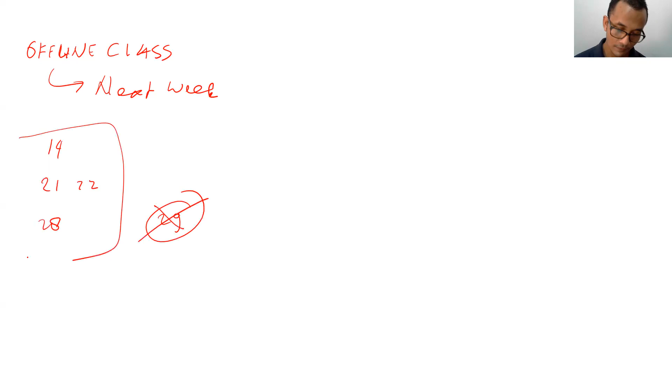Starting from next week, most of our classes will be offline. If you take a look at the schedule, including today, we still have 4 more classes. Today is 14th of April, then next week we have 21 and 22 April, and the week after we have 28 April. Unfortunately, 29 April is cuti bersama, so we will consider this a public holiday and there will be no class that day. So we only have these 4 classes left: today, 2 classes next week, and 1 class the week after.

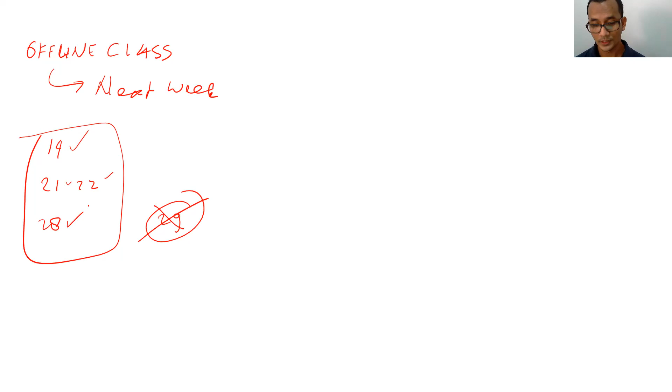In order to ensure that you can catch up well with the topics I have delivered up until now for the preparation of the final exam, starting from next week our class will be done offline mostly. So on 21, 22, and 28, we will do our class offline.

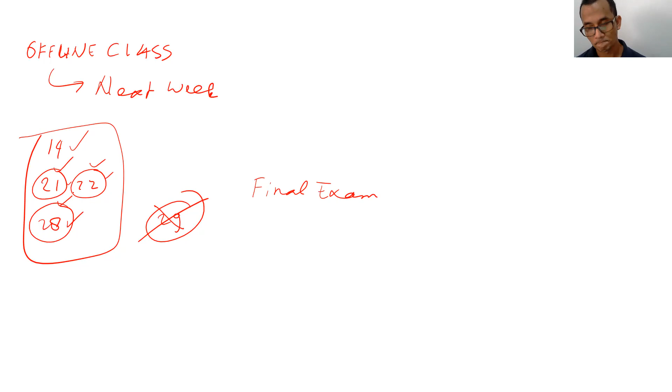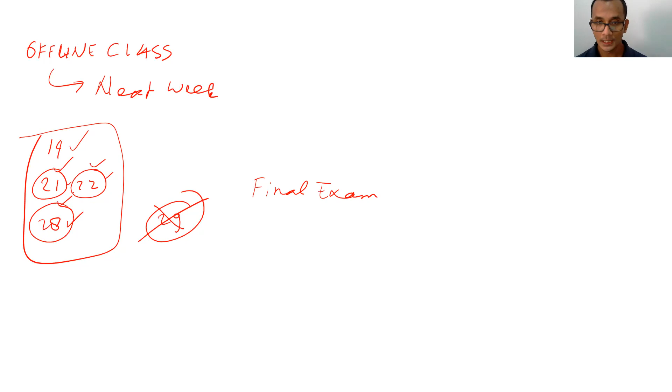But for those who are sick or who, because of unfortunate circumstances, got COVID or something like that, in order to ensure those students can still listen to my class directly, I will make it so that online is available as well. So actually, these 3 classes will be hybrid.

But I encourage you guys to come to class offline, to come directly, so I can teach you face to face on these 3 days. I have already booked the room. The room for this hybrid class will be room 4104, in our faculty building, level 4. Please come to class on these 3 days.

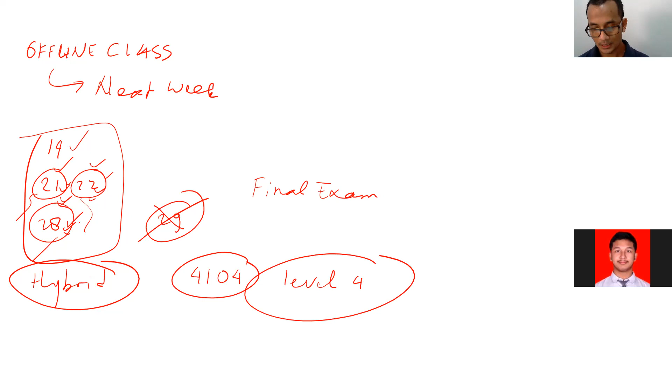For those who are sick, or who unfortunately got COVID, you can still join the class online. But for those who are not sick, if you are healthy, I ask you to come to class. Any question about our class next week, starting from next week on these 3 days?

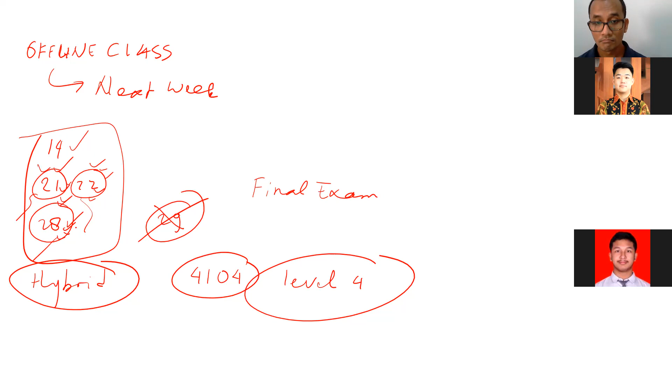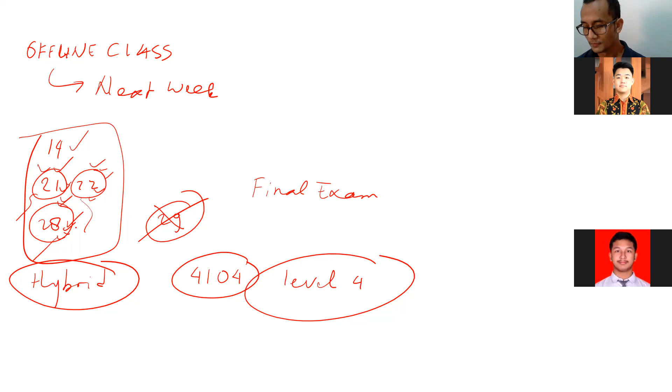Sir, is there any specific things we should bring to the class? Not necessarily, just bring yourself and dress properly, don't just use underwear like that. That's supposed to be enough. Just bring your notes and your own pen. I think that's supposed to be enough. Nothing necessary for this, so there's no need to prepare something special. If you want to bring your calculator to practice as well, it's supposed to be okay.

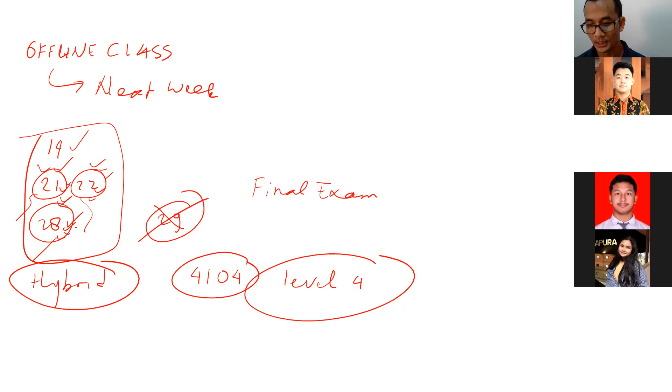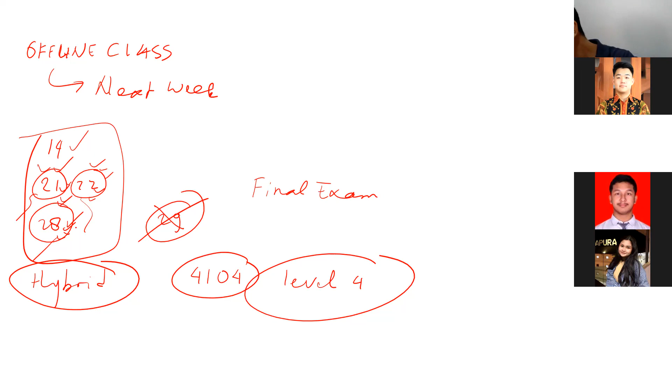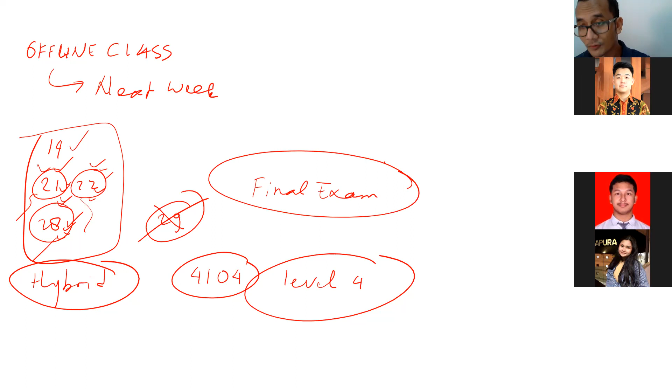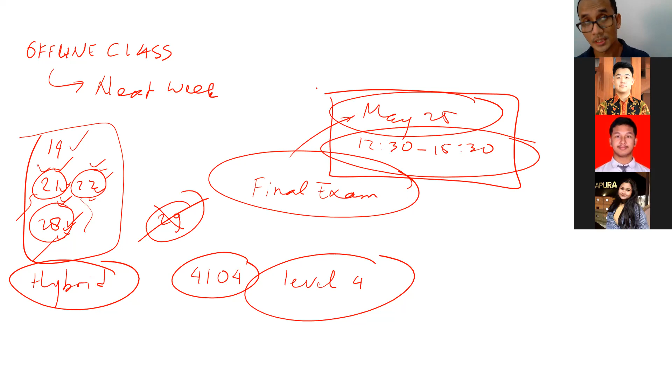And one more thing, I need to inform you as well about academic matters, because you need to know about your schedule for our final exam. Our final exam will be held on the third week of the exam period, the last week of the exam. It's on May 25th, from 12:30 to 15:30. Actually, this schedule is there on academic.iba.ac.id. Based on the discussion between the lecturers, we will stick with this schedule.

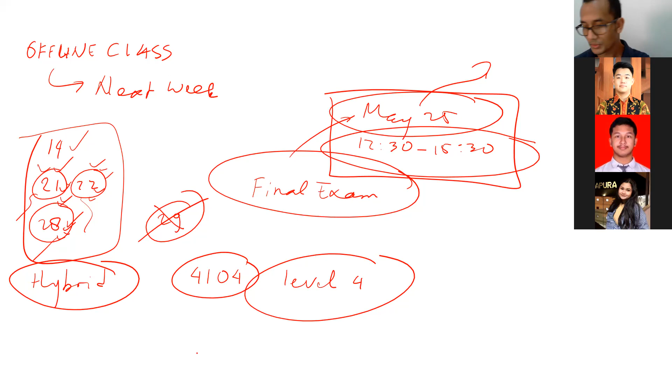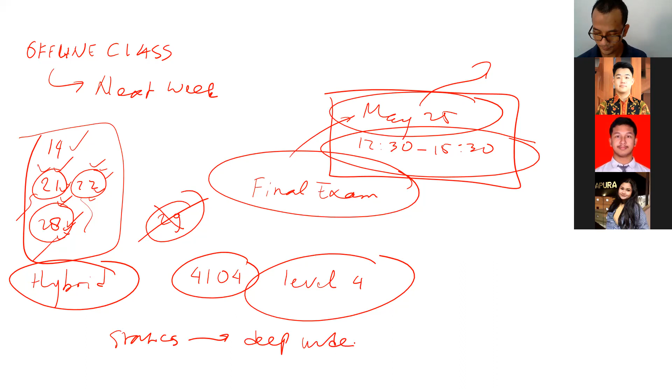Maybe some of you are wondering why suddenly we do this offline or hybrid class. It's most likely because statics is one of the subjects that needs deep understanding, and delivering the class fully online makes it hard for me to deliver everything to you guys. Sometimes there's a connection problem, and I cannot see your face directly, I cannot see your eyes directly to know whether you understand or not. So at least I will use the last 2 weeks of our class mostly for offline meeting. Any question about this?

So starting from next week, on Thursday at 10 a.m., instead of coming to the Zoom meeting like this, what you have to do is go to campus, go to the FME building, our faculty building, go up to the 4th floor, and try to find this particular room. We will start the class at 10 in the morning.

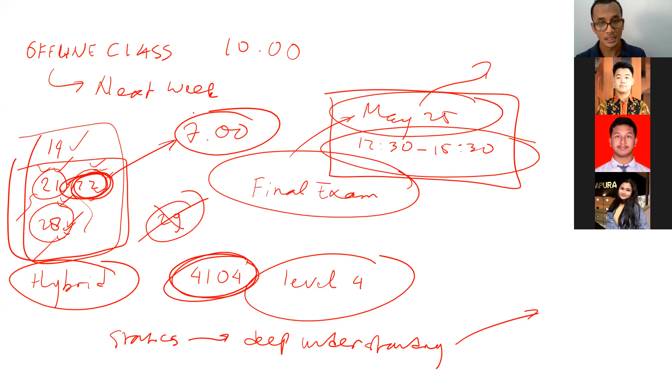The challenging one will be this one, Friday 22 April. Why is it challenging? Because the class will start at 7 in the morning. I will try to do this as well in order for you to get used to it next semester, or for some of you taking a short semester, you have to get used to it, because starting from our short semester, based on the information I got, most likely it will be full offline.

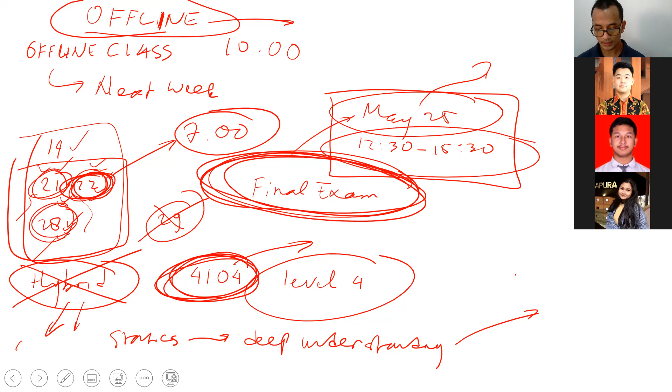In that case, I think I will start our discussion on, maybe this is our last topic. The last topic of this semester is about friction. This topic actually consists of several parts. The first part will be dry friction. In dry friction, I will discuss about the impending motion and the tipping problem as well. So this is the basic of friction, dry friction.

Then after dry friction, we will discuss about wedges. For those who are wondering what wedges are, it's not the shoes that female students like to use, but the wedges we want to discuss here, in Bahasa we call it 'baji'. Something like this, the shape is something like this. Something that you use to stop the door from moving, something like that. Okay, those kind of wedges.

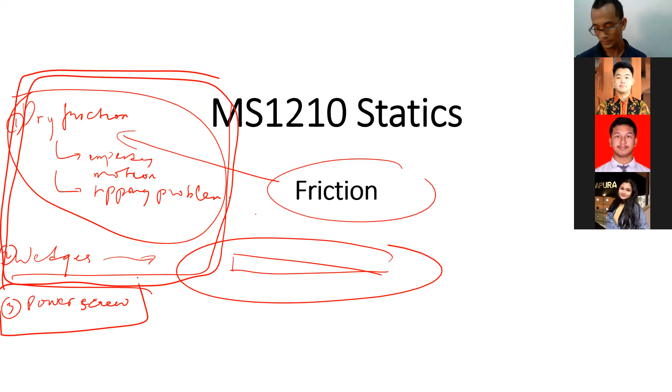That is our second friction topic, and the last one, but I'm not sure whether we will be able to reach this or not, is power screw. Most likely these two topics will be covered in our exam, in the last two weeks, but I'm not sure about this. If it's possible, I will discuss power screw, but if not, we will just concentrate on the wedges. So those are the friction topics we will talk about.

Why is it important to discuss friction? Because in our statics problems, in our mechanics of materials problems, there are several times it is quite often that we face a friction case, a case with friction. So like it or not, we have to know about this.

I think we will start the discussion for today. Our main concentration is on dry friction. Maybe next week on Friday, we will start the discussion on wedges. On Thursday next week, I believe I will still continue the discussion on this. As usual, after today's class, it's better for you to check Edunex for the homework on dry friction, because our Friday class is gone due to holiday.

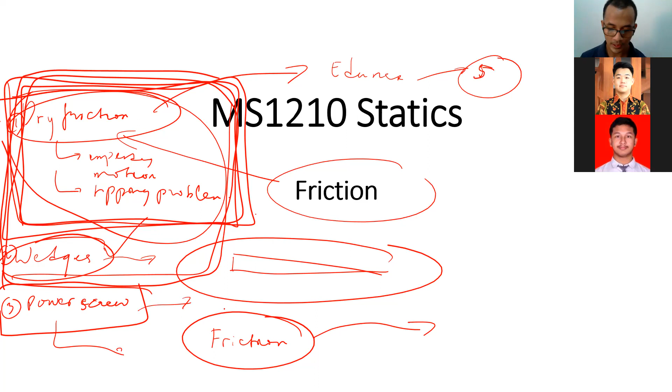So when we talk about friction, there are several types. The first type we will talk about is dry friction. Dry friction is friction which does not involve any liquid.

Dry friction is a friction which does not involve any liquids. For example, dry friction happens on the surface between the asphalt and the tire of the car, like this. We call it dry friction because there is no liquid there.

The second type of friction is fluid friction. Fluid friction is friction which involves liquid. For example, when you swim forward, there is a friction from the liquid, from the water, which prevents you from going faster.

Those are examples of fluid friction, and besides that there are several other examples. If you take a look at the engine of a car, most engines in a car or motorcycle need oil in them. When it runs, there is friction between those moving parts, and because there is oil there, the friction happening in that engine most of the time will be fluid friction, because it involves liquid. So that's the second type of friction.

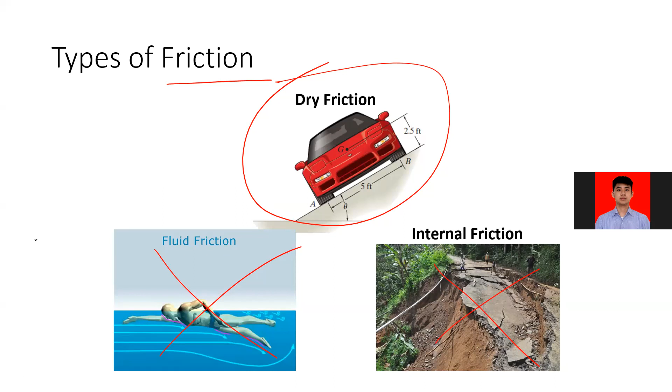Alberto Hans, is it correct? You learned about friction in the first year in ITB? Mu kinetic, mu static, yep, that's the one you learned about, right? Yeah.

So in the first year, when you talked about friction in a physics problem, I believe you discussed about friction as well. So the things we will discuss today are a continuation of that.

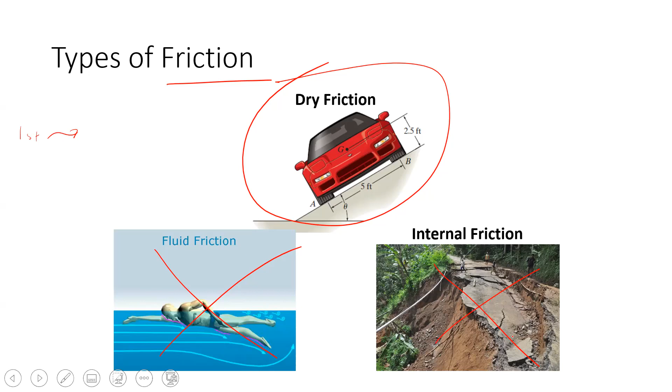Let's continue. Now we will talk about the detail of dry friction. In physics, when you have a box like this with its own weight, and it has contact with the ground, then there is a pulling force P trying to move the box from one point to another. In physics, what you learned before, this is the free body diagram you normally draw: you have W, the weight, and P, the pulling force, and because there is a reaction between the ground and the box, there will be a normal force.

Okay, because there is friction on this surface between the box and the ground, there will be friction force. When we talk about the free body diagram, most likely it's like this. When the force P here is bigger than the friction force, the thing will move forward. But if the force P here is less than the maximum static friction force, then the thing will stay stationary, something like that.

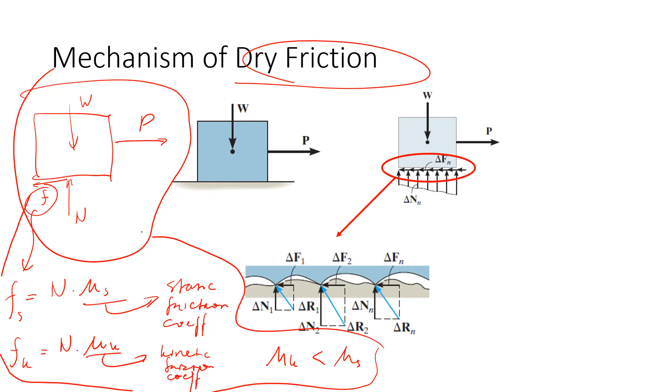But if we want to take a look in detail, and we have to take a look in detail in our statics discussion for the friction here, this is what is actually happening. So instead of like this, the thing that is actually happening is like this, and it is logical.

Why is it logical? Because when we take a look at the normal force and the friction force, it's supposed to be happening at an area, the contact area, and the contact area is supposed to be the one at the bottom here. So the normal force and the friction force, instead of both being represented as a concentrated force, the most correct way is to represent them as a distributed force like this, distributed along the bottom area, for both friction force and normal force.

And if we take a look in detail, if we zoom in at those parts, actually the real thing happening at the contact surface is supposed to be like this. There's supposed to be a normal force at each contact point, because later in your second or third year you will learn that nothing in this world is completely smooth. So when we take a look at one thing and it looks smooth, but if we zoom in at microscopic level, most likely those things won't be completely smooth.

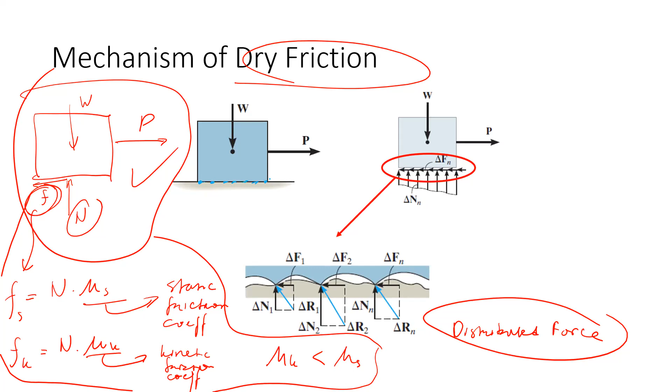Up until this point, is there any question? Student: Sir, just want to make sure that the third picture at the bottom is just the zoomed version of the distributive force, right? Instructor: Yes, the close-up shot, correct. This one is actually the zoomed version of this.

So if we zoom in a little bit at this location, for example, this is what will be happening there. Okay. Any other question before I try to continue with our discussion?

If not, then I will discuss more about this dry friction, and later at the end of the class I will discuss some problem examples. This is the continuation of what we discussed before.

Because the friction force is like this, and the distributed friction force is like that, and the distributed normal force is like this, when we take a look at it, in some conditions this kind of thing is possible, where the concentrated force representing the distributed normal force will not be at the same line of action as the W here.

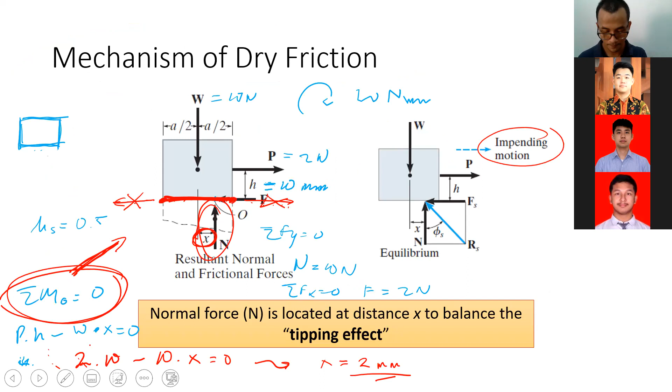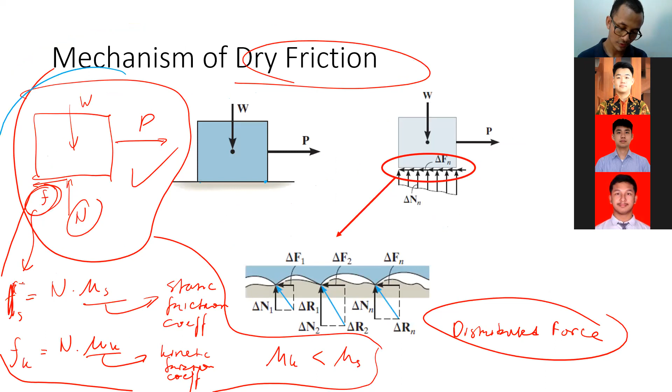When we talk about the normal force, friction force, as I told you before, there are two types of friction force: the static friction force and the kinetic friction force. What are the differences between those two?

When we take a look at this, the free body diagram is as you can see here. So there will be a pulling force like this, W like this, then normal force like this, then friction force like this.

Try to imagine if the pulling force is very small. For example, in this case, our W is like the previous case. Our W is 10 Newton. Normal force is 10 Newton because sigma Fy equal to 0. The pulling force is only 2 Newton. The mu s here is 0.5. Okay, let me charge my laptop first.

For example, in this case, mu s is 0.5, and mu k is slightly lower than that, 0.3 for example.

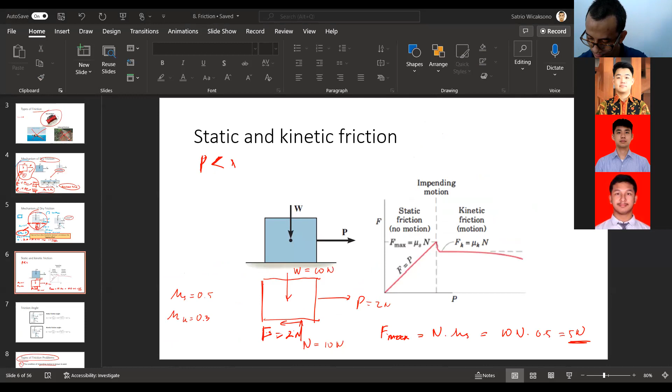Now what is happening here? In this case, the first condition is static friction or no motion, where the pulling force P is smaller than the maximum friction force, F max. So this is, for example, the first condition.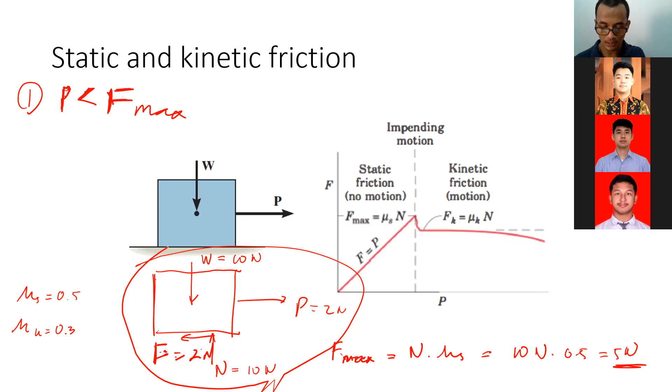Now the second condition: where moving is happening, kinetic friction is happening.

Okay, the second condition is where kinetic friction happens. The kinetic friction happens when the pulling force P is slightly more than the maximum friction force.

What is happening here? Maximum friction force - okay, sorry for the writing. That's the second condition, so this is the first condition and this is the second condition. When the second condition happens, the real friction force that happens will depend on the kinetic friction force.

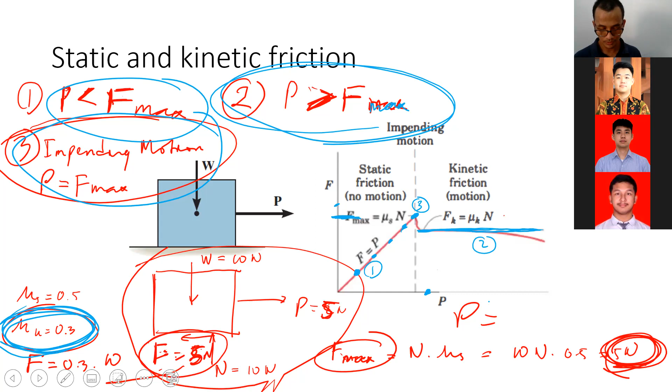Okay, so in that case, I will continue. Beside friction coefficient and the things you have learned before, in this statics problem, we will introduce you to new terms here.

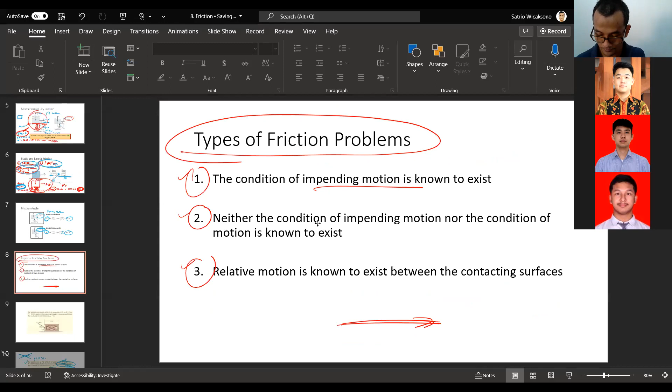Then I want to talk about something very important for us. When you face a friction problem later, normally we can differentiate the problem into three conditions, which differ from one another.

The way to solve it is different between one and the other. The first condition is where in the problem we know that the impending motion is known to exist - for example, it's stated in the problem that impending motion is happening. So that's the first type of problem, when we know that impending motion exists.

Then I will go to the third one first because this one is the easier one. I will talk about the easier problem first. When we know there is relative motion between the contacting surfaces, then we can consider it as the third type of problem.

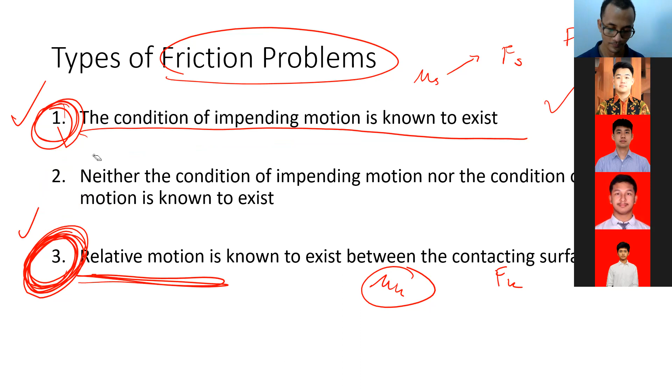The harder one is supposed to be the second one. We don't know yet whether it's impending motion condition or motion condition. So we don't know whether the thing will move, or whether it will stay stationary. That's the second problem, and most problems are actually this second problem, which is the most difficult one. But you don't have to worry about that, the solution is there, so we can still solve it.

In order for you to get used to it, I think I will just show you guys some problem examples.

This is the first problem example. A uniform crate has a mass of 20 kilogram. If a force P of 80 Newton is applied to the crate, determine if it remains in equilibrium. The coefficient of static friction is mu s equal to 0.3. So the problem here is just to check whether it stays stationary or not.

William, hello William. Yes sir. Where are we supposed to start in this particular problem? What are we supposed to do in this particular problem, William? I think I would draw the free body diagram first.

Correct, always start with drawing the free body diagram. We will start with the free body diagram. For example, this is the crate. Then we have a force of 80 Newton there at 30 degrees. The height there is 0.2 meters. The length there is 0.2 meters, sorry, 0.8 meter.

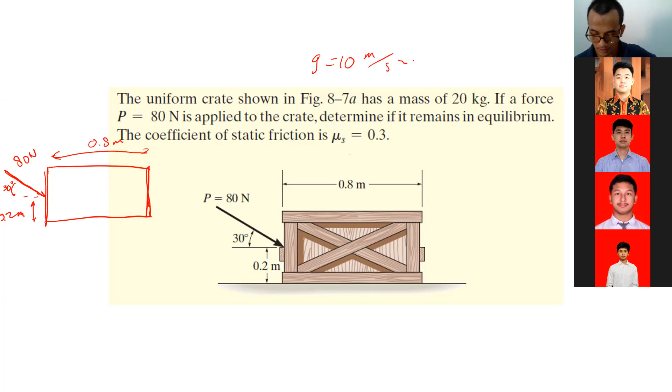What else do we have here? If we use g equal to 10 meter per second square, the weight is 200 Newtons, downwards from the center of gravity. And why it's at the center? Because it's stated there that it's a uniform crate, so it must be at the center. 200 Newton, 20 kilogram multiplied by 10. What else are we supposed to have here?

The friction. Before we go for the friction, I think it's better for us to just add the normal force first. So we have a normal force, let me put it here. This one is normal force. Then beside normal force, we will have friction force.

Then what should we do here, William? In this case, let's just state that the distance between the normal force and the weight is a variable such as x. You can do that. What else? And then sigma moment equals to 0. I think we cannot go directly to sigma moment equal to 0, we're supposed to solve it one by one, right? If you want to use sigma moment equal to 0, sigma moment against which point?

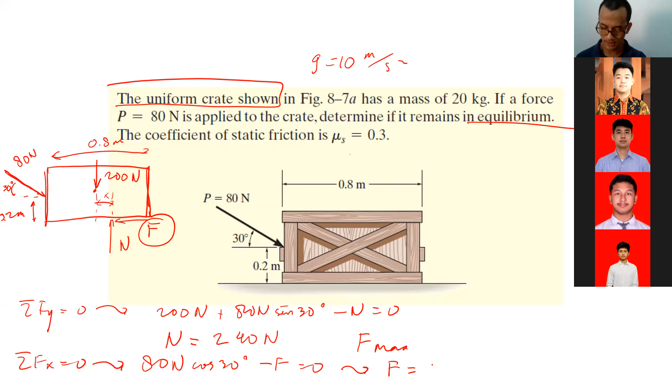What is the value of that, William? 40 times the square root of 3. In decimal? Around 69.3, sir. 69.3 Newton. Yeah, so this is the friction force based on the equilibrium.

Okay, now take a look. We have to take a look again. The value of our F max is supposed to be the maximum friction force possible. Is this value smaller or bigger than our F max? That's the thing that we have to check.

As simple as that. Okay, our F max value is supposed to be like what, William? Should be the normal force times the static friction coefficient. Is 240 Newton multiplied by 0.3, right? What is the value here? Supposed to be 72, right?

Yes, 72 Newton. Now would you mind to compare both? Which one is bigger, F max or F? The F max is bigger. Okay.

If you take a look at this graph, the thing which is happening in the current condition, is it in this impending motion region, or in the kinetic region? In the static region. Why can we determine it like that? Because the friction force based on the equilibrium that we calculate is smaller than the maximum friction force. So in this case, the condition is stationary.

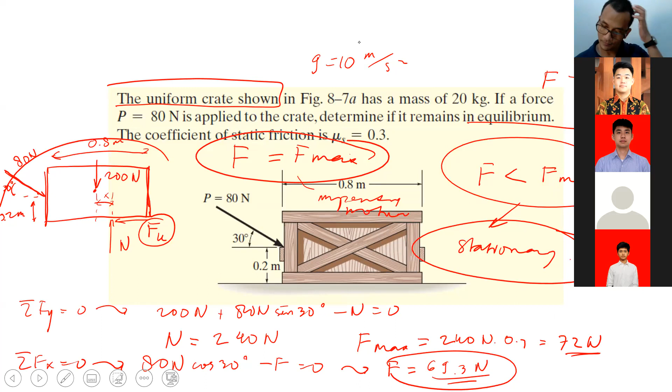Sir, I want to ask, how do you get the Fmax? Where's the 0.7? Sorry, Rehan, I don't get you. How do you get the Fmax?

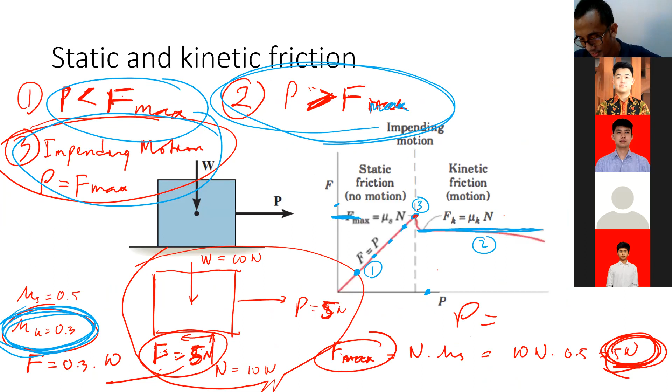We know that mu-s is 0.3, right? So based on our discussion before, Fmax, the maximum friction force available, is always the normal force multiplied by the mu-s, right? Do you get it, right? Yes.

So in this case, in order to determine which condition exists in this particular problem, what I try to do is compare the friction force, the friction force which is happening, based on the calculation of the free body diagram, with the Fmax.

Okay, if the friction force based on the calculation is smaller than Fmax, it means the condition is still static, right, Reinhard? Because the friction is still smaller than the maximum friction force. But if it's the same, then it's supposed to be impending motion, because the friction force is the same as the maximum friction force.

Last one, if F, the friction force, is bigger than Fmax, in this case, it's supposed to be not possible, right? Because the maximum friction force is only 72 Newton, and if the friction force is bigger than that, it's not possible. Yeah, in that case, it means that the pushing force, the 80 Newton pushing force, is too much.

The 80 Newton pushing force is too much, which means that the friction force cannot handle it anymore, which means that the crate starts to move. The crate's moving. Okay, Reinhard? So that's the way to determine it. If the friction force is bigger than the maximum friction force, then it's supposed to be moving.

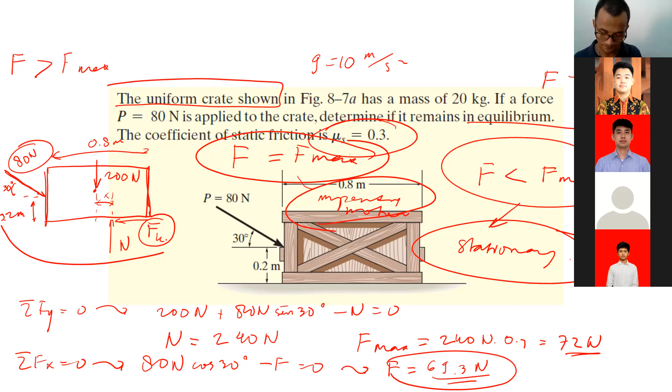Thank you. And in order to draw the free body diagram correctly, we have to replace it with Fk, because we know that it's moving, right? Yes, sir. Okay, any other question about this? If not, then I will continue with the next one. Okay.

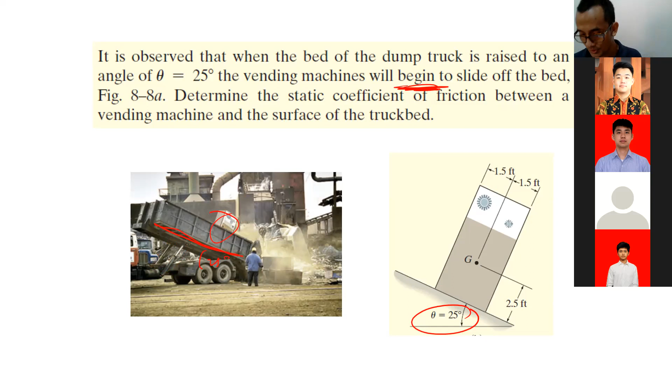Begin - this is the keyword here. Begin to slide off the bed. Now you are asked to determine the static friction coefficient between the vending machine and the surface of the truck bed. So we know that at the angle of 25 degrees, the vending machine starts to slide.

Okay, now based on this particular problem, try to take a look carefully. If you want to give a comment on this, among these three conditions, which condition actually exists in this particular problem? Condition 1, impending motion is known to exist. Condition 2, not yet sure about what condition exists. Condition 3, relative motion is known to exist. Which one do you think exists in this particular problem?

Anyone can give a comment on this? I think it's condition 1, impending motion. Correct, William. It's impending motion because it starts to slide off the bed.

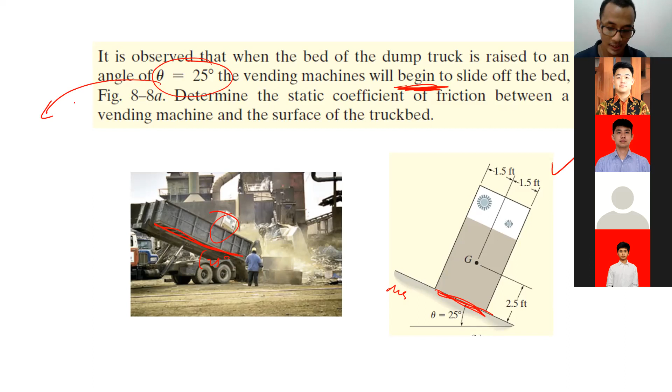So at the angle below 25 degrees, if you can see here, the condition starts from 0 degrees, then it increases bit by bit until it reaches 25. When it reaches 20, before it reaches 25, it stays stationary. But when it reaches 25, it starts to move. So the condition here is actually the limit condition. So we can say that this condition is the impending motion condition.

Because we have the keyword here, begin to slide - the starting point of the sliding. Okay, so that's the limit condition. Anyone want to ask a question about this? Why is this condition the impending motion condition? If you are still confused about this, let me know and I will try to explain to you guys before I start discussing how to solve this.

Anyone? No? Okay, so based on our discussion just now, we agreed that this condition is the impending motion condition. Impending motion exists.

Reinhard, sorry, Reinhard, just now you already asked about it, but you haven't helped me answer the problem, right? Okay, anyway, you're the class leader, right, Reinhard? Yes, sir. Okay, about this, what are we supposed to do first, Reinhard? After we know that impending motion exists.

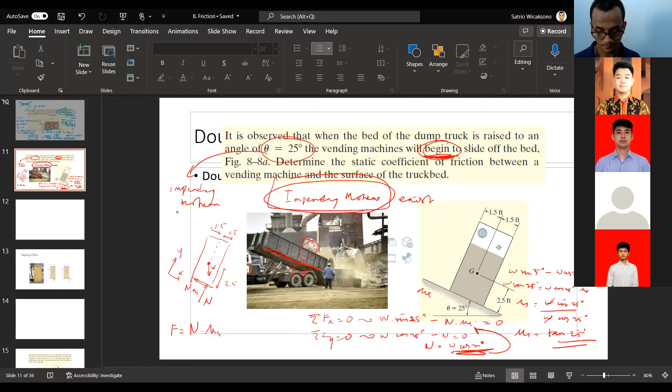Sorry, sir, I have a question about the previous section. Yes, who's this? It's Shan, sir. Did you join the previous exam? I did, sir. Your condition is okay now, right? Yes, it's okay. What is your question?

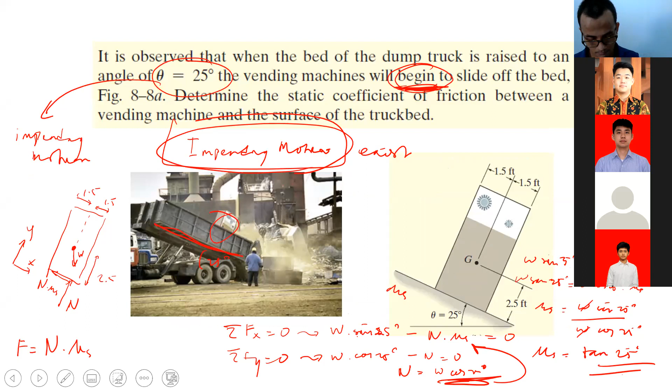Earlier, I think, there's the equation for arctan mu s, yes sir, from the beginning of the class. You mean this one? So does that work on these types of questions, sir? For example, if we have an angle, can we just use tan of that angle to find mu s? Yes, actually, we can use that.

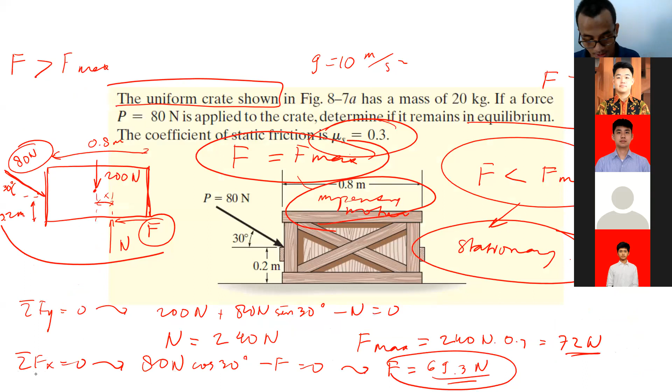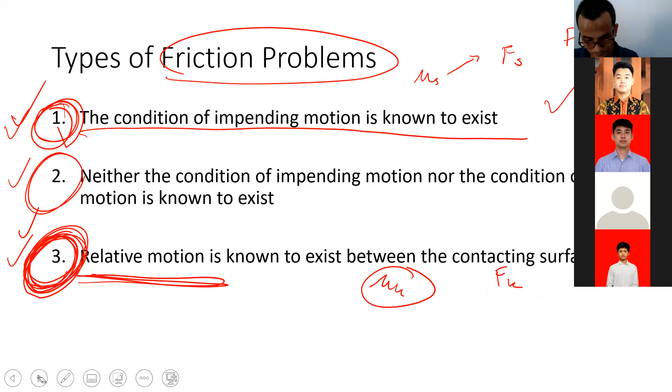Okay, so if we draw again the free body diagram, like this, for example, there is a weight here going like this, weight, okay, and there is a normal force, and there is Fs, friction force, there.

Something like this. And the resultant of both is supposed to be like this. For example, this is the resultant, and this one is the angle, phi s. Do you get it, right? Yes, sir. The resultant in this kind of action is supposed to be on the same line of action as the weight. Why is it like that? Because although it's impending motion, all the things are in equilibrium condition, right?

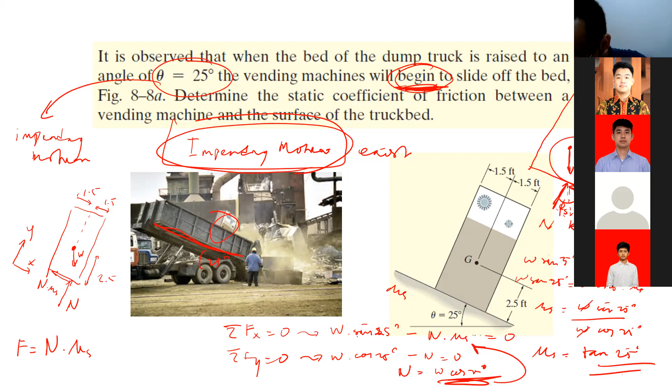Yes, sir. So if the equilibrium equation is supposed to be happening, Rs is supposed to be on the same line of action as W. That's why the result for mu s is the same as tangent 25 there. It's because Rs is supposed to be on the same line of action as W.

Do you get it? But if you solve it this way—this is the line of action of Rs, this is the line of action of W—it's supposed to be on the same line of action in order for us to have an equilibrium condition. Do you get it? Yes, sir, so the result is the same. That is why the result is the same.

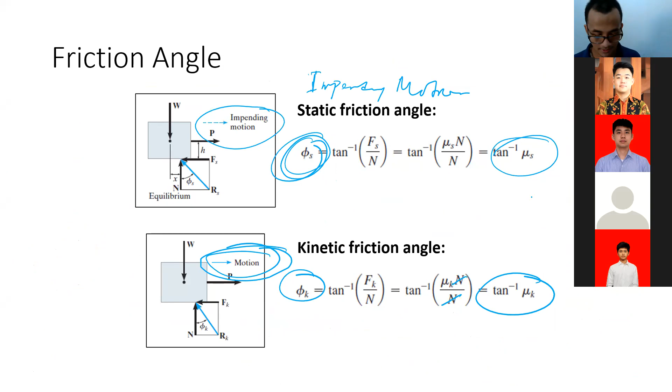Okay, phi s then is supposed to be the same as 25 degrees, so mu s is supposed to be tangent 25 degrees. So that's why the result is the same. But if you do it that way, I'm afraid we miss the process. That's why I didn't teach you to solve it that way. What I try to inform you guys is how to solve it one by one using the equations that we have. You get it, Sam? Okay, sir, thank you, sir.

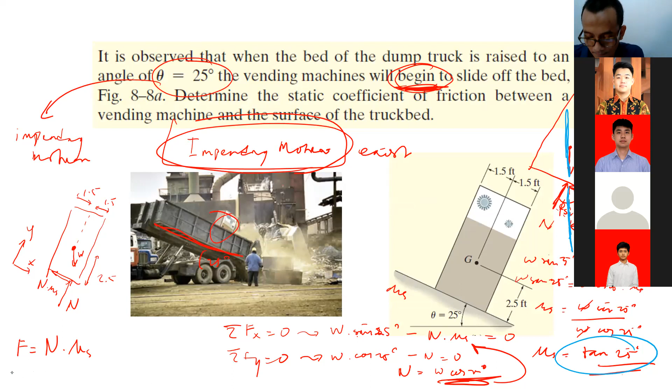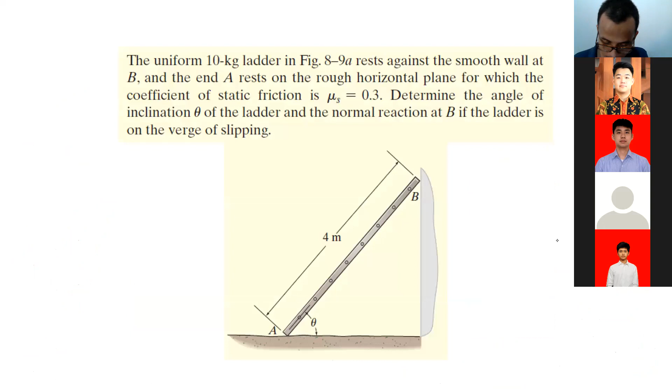So this one is impending motion. So basically, wait a minute—if this is your homework...

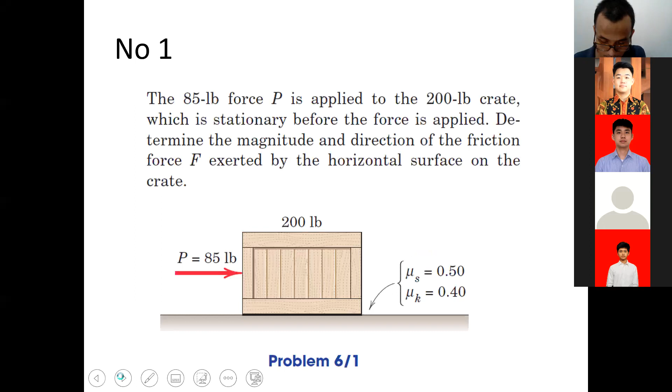You can see, right? This is your homework later. Some of the problems are basic, but some of them are tilting problems. I think you can try to learn the tilting problem by yourself first.

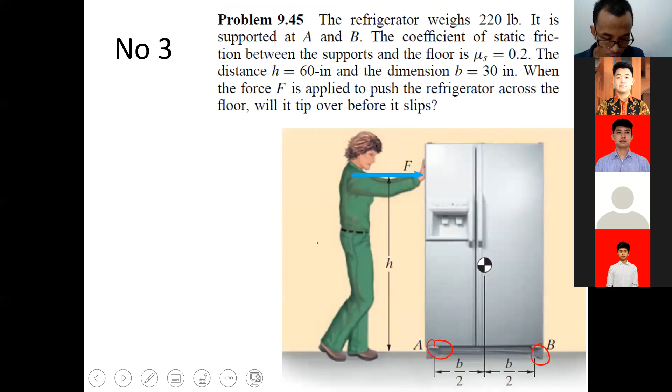So basically, when we talk about a tilting problem, we can just move the force. But in this one, the force is only concentrated on this point. Next week we will discuss it, but try to do it first so you can learn by yourself about the tilting problem and other problem examples here. Try to finish it yourself in your homework. I will publish the homework maybe in the afternoon. My assistant will post it, but you can check later.

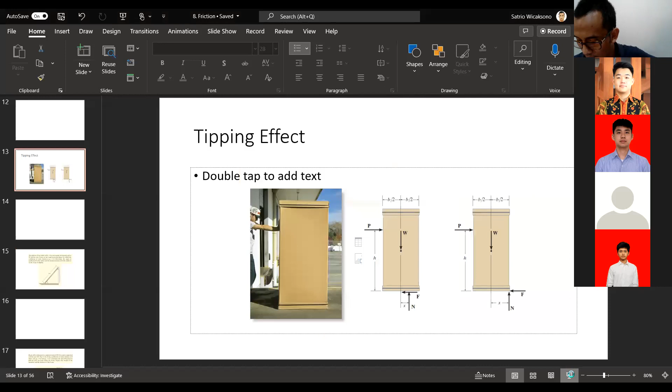Okay, wait a minute. So basically, this is the tipping effect. Later this will be part of your homework as well, but I will discuss a little bit on this. When you push, as I told you before, the force from P and the force from friction will create a moment, a clockwise moment in this case. Can you see my PPT on the tipping effect here, William?

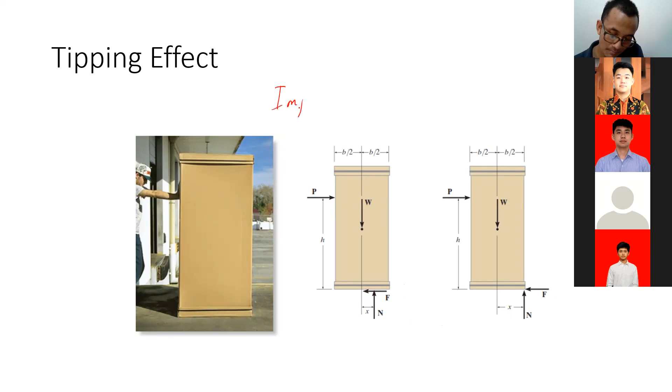When the normal force is at the edge like this, it means that the condition is impending tipping. What does it mean? It means that tipping is about to happen. If you increase the pushing force, tipping will happen.

That is why if you push a refrigerator, or anything tall like that, or a table, or a desktop computer - if the pushing force that you give is too high, or the height is too high from the ground, there is a high possibility that the thing you push will tip over.

The condition of impending tipping is when the normal force is at one of the edges - it cannot be more than that. If it's already in this condition and you increase the pushing force even more, or increase the height of the pushing force even more, it will tip over. That's the condition of tipping, that's the idea of tipping.

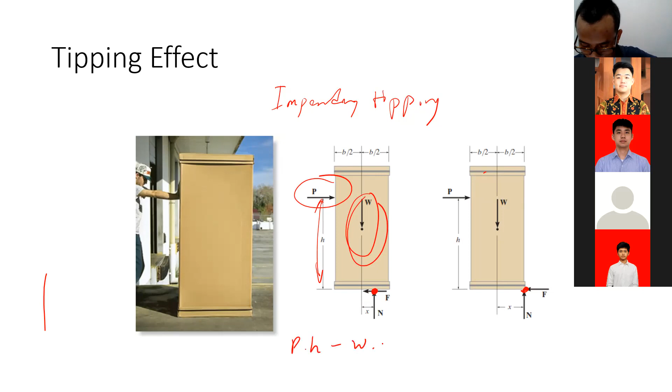Normally, to solve this, we can create a sigma moment at the location of the concentrated normal force. In this case, P multiplied by H minus W multiplied by X is supposed to be equal to zero. Most of the time it can be handled, but if your X value is more than this, it means that the normal force is outside of the edge - it means that it's already tipped over.

I will discuss about this even more next week after you try to handle your homework. Please try to do your homework as best as you can. If you have a problem with that, next week we will discuss about it.